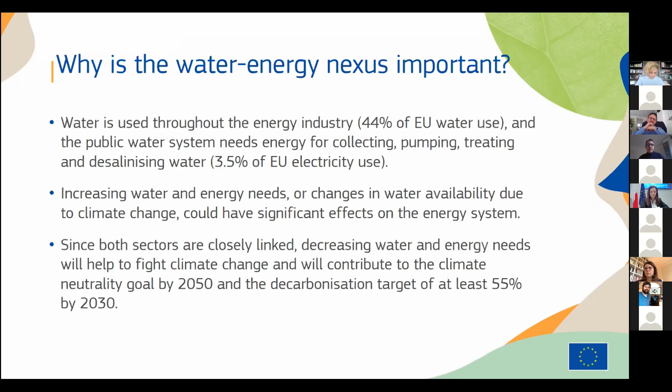So we believe it's important to address this, and it will be increasingly important because water availability due to climate change will also have an impact not only on water use but also on the energy system. Decreasing water energy needs is absolutely necessary for us to meet our goals by 2030, but also further in 2050. If we focus a bit more on the European Green Deal on the energy side, we have supplying clean, affordable, secure energy, and building renovation as important elements, and these are key areas we are working on.

I will focus a little more on the energy efficiency work we're doing in this area, relevant for the water energy nexus. One thing we are currently doing is reviewing the Energy Efficiency Directive. We've had an open public consultation, and specific workshops looking at energy efficiency in sectors. There we've seen that water is also seen as an important area for further focus when it comes to the Energy Efficiency Directive.

The second important element is the Energy Efficiency First principle, which was enshrined in the European acquis, and we are now working to operationalize it. How are we doing that? There is some reference to the principle, and even a definition in the Governance Regulation under which member states must come up with national energy and climate plans. The main focus of this principle is to ensure energy efficiency measures are prioritized when they are the most cost-efficient solution. We are currently working on a Commission recommendation and guidance on how this principle should be implemented in the energy sector, but also beyond it, for example for financing and possibly also for the water sector.

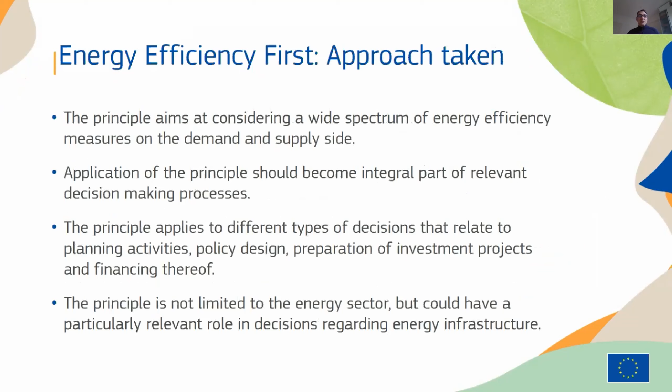The aim is really to consider a wide spectrum of energy efficiency measures on demand and supply, and that energy efficiency is taken into account wherever decisions are taken. This means not only political decisions, but also very practical decisions in terms of planning, policy design, investment projects, and financing thereof. As I mentioned, this is not only limited to the energy sector, but also energy infrastructure, and hence also water infrastructure.

And when I say water, it's important to continue looking more in depth into this link between energy efficiency and water efficiency when decisions are made about, for example, investment into wastewater treatment or other areas such as separate treatment of stormwater. It was already mentioned by Ms. Manfredi, the losses are enormous. Losses of water also mean losses of energy, because the water needs to be pumped and treated. So this is important to look at.

And finally, we will also increasingly look at smart technologies and processes to ensure these technologies are being brought to bear in this area.

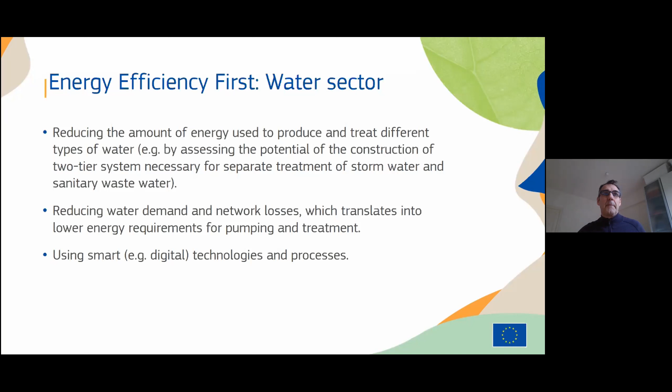Looking a bit more in detail at the Energy Efficiency Directive, which we are currently revising, in particular Article 7 is important because it forces member states to have annual savings, every member state at 0.8%, in the case of Malta and Cyprus a little less, given their specific position. We've seen over the last years that in delivering on Article 7 obligations, member states have taken measures covering the water sector, and in fact Malta is one of the countries that has done most in this area. We would like the example of Malta to be elaborated upon and followed by other member states, because much more is possible.

We also have articles dealing with energy audits. So far this is very much focused on energy, but here too the water sector could do much more according to us. The directive also covers, for example, information to consumers about the use of domestic hot water, which is also very important to raise awareness.

When we talk about awareness, an area that's often forgotten in this field but plays a very important role is what we do on eco-design and energy labeling. You will hopefully know that the energy label changed in the beginning of March this year, where we removed the plus classes from the label in the hope that it becomes more effective. We have measures in place for washing machines, dishwashers, pumps, circulators and motors, which already drive an enormous amount of energy savings, almost in a hidden way.

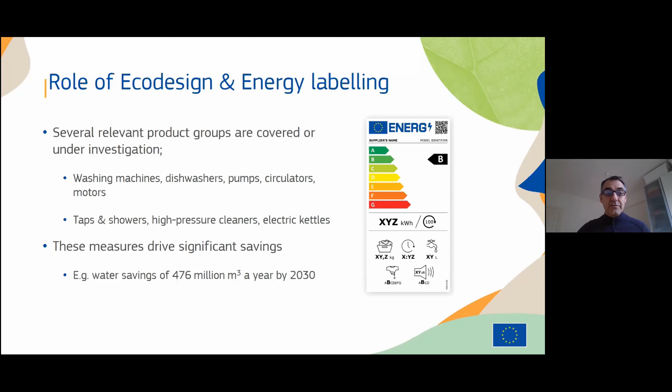Thank you very much. I think that this, and we didn't doubt it, both in the case of Madame Manfredi and Mr. Nuij, opens us up to dealing with these questions in two ways. One, there is a readiness to deal with this question that probably was not there before — not for ill will, but simply because the times were not right, perhaps. You gave us very concrete hints about where our priority in explaining and talking about this question should go, and second, what potential this happy marriage could lead to, both in DG Energy legislation and in water legislation.

I would like now to go to the more concrete part of our work, which is to show what is being done now. You both talked about the need to work with the private sector. I think that is absolutely true, and there is a part of the private sector, at least, that is ready to go, and that started even before the legislation comes — but of course we need to scale up and make it even more systematic.

So I would like now to start the second part of our meeting, which is very rightly entitled — and I want to read it again so we know the framework — 'Realizing the Water Energy Nexus: Case Studies to Support Current EU Policy Implementation and Future Policy and Regulatory Development.' We know that implementation, above all in these issues, is the most important problem of European Union legislation.

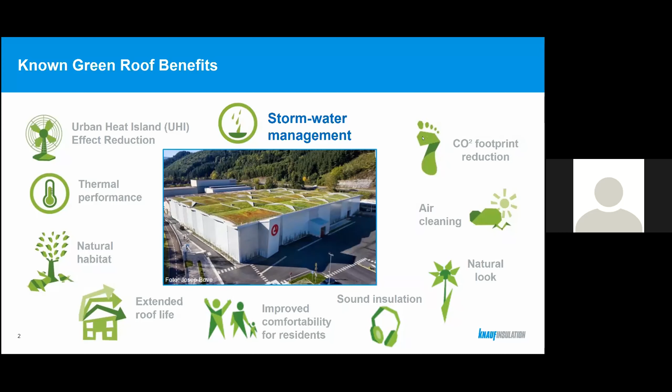So how can green infrastructure actually support the water energy nexus? When you're building a new building, usually you go on the ground, demolish the green space, and build up something — you seal off all the land so the water cannot escape into the ground and later evaporate. So what we need to do is make sure that when something new is built, we make it green immediately, because if you do that, you basically replace whatever you demolished when starting the building.

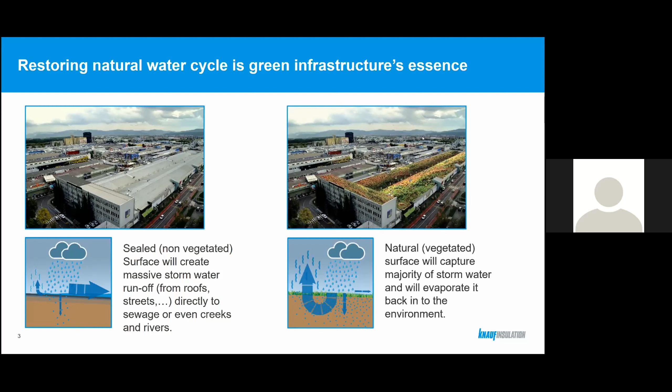You actually do the green part on top of the roof, making sure that all the stormwater which comes from the clouds is captured, retained and evaporated. With this, you re-establish the natural water cycle, which could otherwise be demolished by intensive urbanization. So I will just focus now on two case studies where municipalities and some countries are already thinking about how to implement green infrastructure into new builds.

So, for example, you see on the screen a big shopping mall which was built in France. There was a requirement from the local municipality that if you want to build that, you need to re-establish the stormwater cycle, the water's natural cycle. So just by implementing a green roof on top of the building, the commercial establishment is actually preventing more than 60% of stormwater from coming into the sewage system.

This means the water which would otherwise go into the sewage system without a green roof will actually save a massive amount of energy needed to clean it. If we make sure the water stays on top of the roof, it will evaporate and re-establish the natural water cycle, never reaching the sewage treatment plants.

So there are two benefits: energy efficiency, and when big storms come, it's even worse for flooding of the sewage system. The wastewater cleaning facilities sometimes cannot cope with all the water coming at the same time. They need to open the safety wells, and all the sewage and storm water goes directly into the creeks and rivers, polluting them.

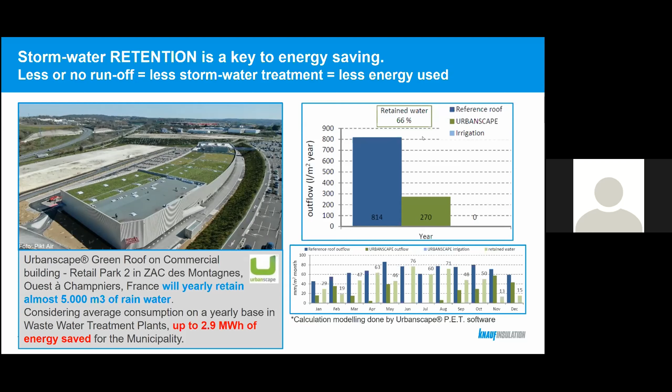Going further, here's an example we planned for the last 2 years: an educational green roof on a school in Slovenia, where I come from. It's basically a roof which, on one side, captures the rainwater as seen before, but at the same time we also implemented a special system which really reduces the amount of water going to the sewage system.

If you imagine how climate is changing a lot, you get these long rains or really short intense rains. The major negative point from civil engineers was always that green roofs do not detain water - when the green roof is full, like a cup, the water will still go through into the sewage system, and you'll need to clean it.

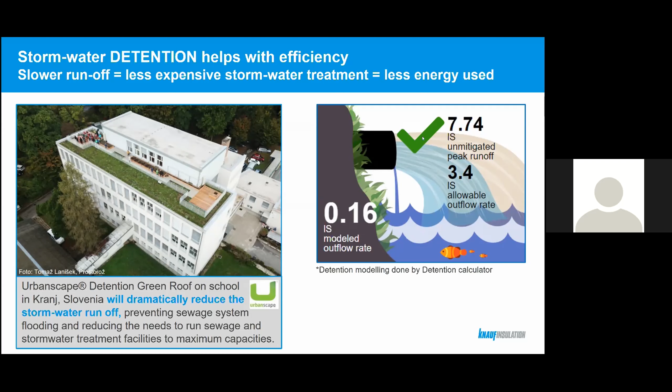But new system developments for green roofs are actually able to control and lower the speed of water going from the roofs into the sewage system, meaning this water comes into the sewage only after a certain time when the storm is over. So the stormwater treatment plants can easily handle this without additional capacity, meaning no extra energy is needed for this kind of cleaning.

So these were the two examples showing that implementation of green roofs really handles the stormwater, preventing it from reaching the facilities that clean stormwater or sewage.

There is plenty of legislation currently ongoing or being reviewed. I'd point out first the Urban Wastewater Treatment Directive, where so far there was no mention of green infrastructure as a way to handle stormwater or limit inflow into the sewage system - this is definitely something we need to improve in legislation. The new one is definitely the Energy Performance of Building Directive, which is another good aspect.

Then we have the Biodiversity Strategy 2030 - we've seen the first drafts, now in parliamentary procedure, and we know urban green infrastructure has already been incorporated. Then there's the Climate Adaptation Strategy, adopted last month, and we're happy to see a lot has been pointed out in terms of green infrastructure.

And of course, the new EU Bauhaus initiative - just the last two Fridays we had open calls with this initiative, people getting together sharing ideas. You could see the enthusiasm of regular people and academia, where they see green infrastructure as one of the cornerstones to support our cities becoming better, more energy efficient, and more green. So there's still plenty to be done, but a lot has been done already in the last 2 to 3 years - we just need to progress with this.

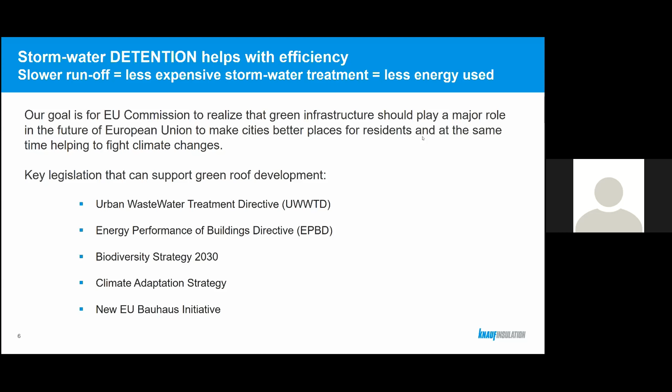That would be it. Jure, I have a question for you. First, can you switch on your video, because I'm not able to see it.

Yeah, I will try to do that because I'm connecting through the web browser, not through the app. So I'm not sure whether I can. But anyway, I just wanted to ask you one question.

You indicated in a very effective way the legislation where you could see certain improvements there. I just wanted to ask, because I'm curious, and we will have other questions later on. What is the situation in the European Union in terms of implementing urban green infrastructure? Is it going on, or is it something that really needs a European push?

I think what the European Union would need to do is, of course, properly implement green infrastructure as a cornerstone of all major legislation. But at the same time, the EU should promote green infrastructure through public buildings—putting green infrastructure on schools in order to tackle climate change and save energy. It's also amenity space where kids could learn. The school I showed actually has an outside class on the roof. Then there's health establishments and office buildings from governments and municipalities.

Thank you. I hope you can see my screen. Yes, we can. Yes, super.

Referring back to the previous speaker, I can only agree with the figures about the water industry using a lot of energy—I think the figure was 3.5% of all electricity used in Europe. And both speakers have talked about leakage. Reducing leakage also means reducing energy consumption, as well as the point that wastewater facilities can in fact be energy producers, and that's exactly what I'd like to touch on with this case.

I won't go too much into the technical details, but we've had over the years a very close cooperation with the utility in Aarhus, Denmark, the second largest city in Denmark. What's interesting is that, as you can see in the pictures, it's a traditional activated sludge treatment plant—like probably 80% of facilities in Europe. And the water supply is based on groundwater, which I think is the case for 60% or so in Europe. So it's a very traditional water cycle on the drinking water side.

On the wastewater side, it's not a new build, it's an old facility covering around 200,000 people. The other important thing to understand about this catchment area is that for the energy use I'll describe, there are no windmills, no solar panels, no heat pumps, no sludge from other facilities, nothing from the food industry, and the sludge is not burned. It's not because we have anything against windmills—not at all, we love them—but it's super important to understand that this can be copied. It's basically household wastewater and traditional drinking water supply, so there are no tricks with energy coming from outside or sludge from another facility.

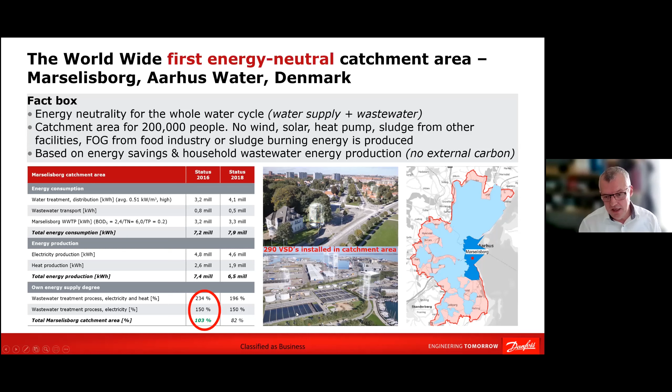If we look at the 2016 figures, they were in fact in plus - meaning they had all the energy they need for the wastewater facility, plus enough surplus to pump water into the city, pump the groundwater up, and pump the wastewater. So for 200,000 people, you can make both drinking water and wastewater energy neutral, or at least at balance, converting wastewater facilities into energy producers. What's really key here is what has been done to this facility.

It's super important to understand it doesn't need to be a newly built facility. This is our old facility, I think 30-40 years old, and it looks like the major part of facilities do in Europe. What were the key elements? One was a tremendous lot more real-time sensors, which is basically what we mean by digitalization - combining different sensor signals in different ways.

They of course use highly efficient components, as there was a talk about also, and then they have full-blown controllability - we have variable speed drives and so on, so you can really adapt to the changes in the water industry. And if you combine these with real-time process control, then you can gain these things.

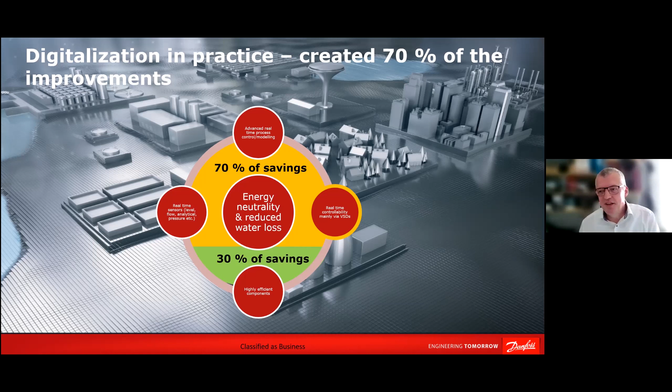So the component savings are around 30% of the whole savings they've achieved. But we certainly need regulation pushing on utilizing all this energy embedded in the wastewater, while also reducing leakage, because they would never get to this point if they didn't have low leakage. They have leakage around 6% or so - if they had leakage of 30%, they would use far too much energy on the drinking water side.

We really need somebody to push more on how we can utilize this. This is a case showing it's possible in practice - it's been working for 5 years now. We have 3 or 4 other facilities in Denmark doing roughly the same. We see US, Chicago picking up on it. We see the Dutch picking up on it. So it's slowly moving, but I surely think we need some regulation to move forward.

I could add that the Danish government, based on this experience, has made a decision that they want Denmark to become, on the water side - both drinking water and wastewater, small facilities and big facilities - completely energy and climate neutral by 2030.

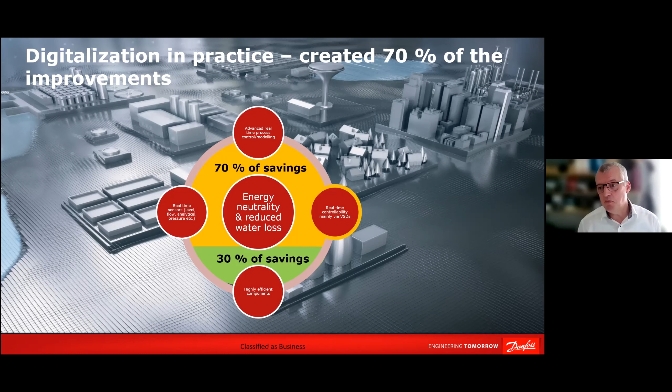And it's probably even a better return on investment in the major part of European countries than we see here. I know the electricity prices, which are key here, in Denmark are lower than, for instance, in Germany and a lot of other places, and Italy and so on. Italy has roughly double the price of what we have in Denmark, so with a double price you'll have an even better return on investment. So yes, I think that was the words.

Monica? Yes, I'm talking to myself. Can I just ask you a very quick question as a follow-up?

I think one of the issues we have to underline is this point that savings come from the process, not only from the technology. That's really key, because the industrial process is different from the specific technologies, and sometimes the two things get mixed up, and the potential of both gets mixed up too. Sometimes this isn't conducive, because we're not talking about single products, but about the whole industrial process that makes the difference. I think that was a very important point.

I'd like to ask, you talked about the prices, but did you have interest from other countries, since you're a multinational active in other countries as well? I wonder if there's interest in this concept beyond your own country, and if you can think ahead about what the next step is. Briefly, and then we move to the next point.

Yes, we have seen a lot of interest around the globe. I'll say California has picked up a lot and is in the process of copying some of this. Chicago, similarly in the US. We've seen China have interest in it as well. In Europe, we've seen the Dutch looking very much into it.

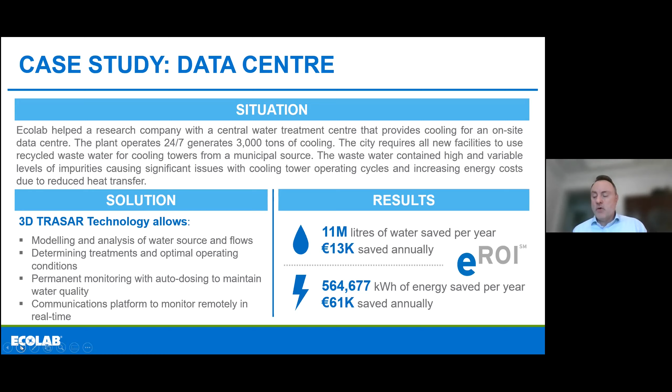As I wrap up, I just wanted to conclude on a couple of points. Industrial competitiveness, and one of the tools we could think about and would support, is the EED as an enabler to leverage further the water energy nexus. I would say many multinationals today are aware and understand the connection between water and energy, and therefore can identify energy savings.

Cost savings not only have a positive impact on the environment, but as well on the bottom line. There is a tremendous opportunity to expand that as well to small and medium-sized companies in Europe, and by doing so, enhance EU industrial competitiveness across the board. We believe EED is a very adequate tool to help enable that - not the only one, but one that can help.

We see that EED Article 7 is a great opportunity to educate these companies on the opportunity to improve their business and help count toward energy savings targets. Maybe what is needed is an incentive scheme at member state level to bring this to the attention of companies and plants. I think hopefully today, by having this workshop, that's a great way to illustrate examples on how that can be done. Thank you.

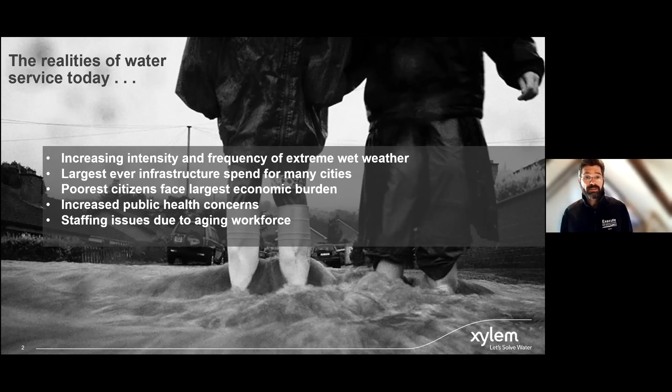But we also understand that our citizens are under a lot of economic pressure, and it's a huge burden on the taxpayer to also address water infrastructure updates or growth of our infrastructure. We understand that public health is becoming more and more critical, especially in the last year and a half, where the pandemic has hit us all, and understanding how we can use water as a tracer is critical. Then within the water sector, we understand there is a very aging workforce, and the transition there is getting critical as we are facing the availability of new technologies.

When we look at the industry right now, we are facing a very difficult status quo. The status quo is that we are investing billions into infrastructure for water supply, sanitation, and stormwater management, and it always requires more because of the challenges I was just mentioning before.

The problem underlying this is that we are maintaining heavy investments in conventional gray infrastructure, which adds huge pressure on taxpayers and local governments. It's critical to address this.

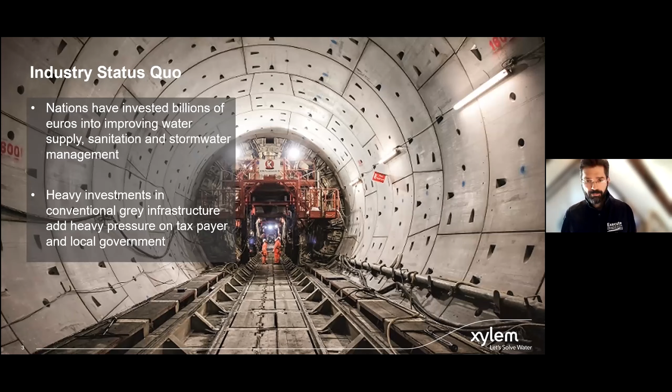The picture you see here is the Tideway Thames tunnel, about a €6 billion investment in London to manage stormwater underneath the city. That structure is huge in terms of investment, environmental footprint, and energy use for managing the draining of stormwater.

So how can we, together with public policy, advance to the next generation of infrastructure, both to reduce the cost of providing such services and to make them more sustainable, reducing energy use and footprint while improving the management of water?

The benefits we always call higher performance and better efficiency are actually very tangible. I'd like to highlight capital savings, and I'll have a case story about this in a minute. Also operating efficiency, both for energy use and labor efficiency, focusing labor on more active or efficient tasks. Affordability, public health, environmental quality, and resilience. Resilience for critical infrastructure is something we're discussing recently, and it's important to address.

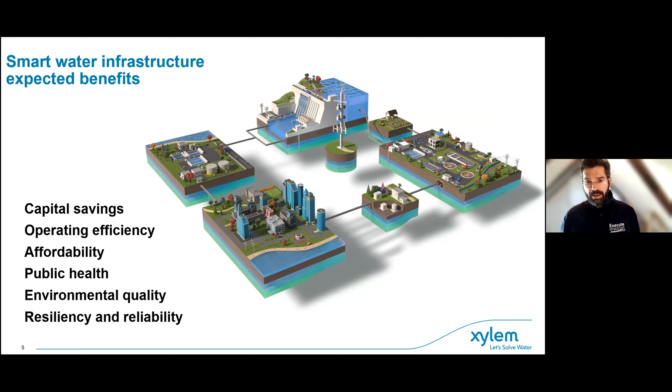I'll go through three case stories here very briefly, since I know we're a bit short on time.

The first one I'd like to highlight is the use of a digital real-time decision support system. It's a complex term, but basically it's the use of artificial intelligence to sense, using sensors within the treatment plant, predict by learning the historical behavior of the processes, and support the operator in taking decisions and tracking those decisions over time.

The case story here is happening in Cuxhaven, Germany, and it led to a saving of 26% of energy use in the biological treatment of this wastewater treatment plant, resulting in about 1.1 million kilowatt-hours saved annually, equivalent to 330,000 euros per year. So in perspective, it brings up huge potential.

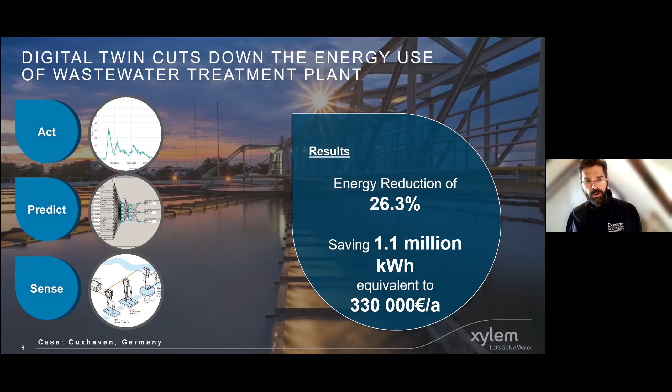If you combine this with the results shared by Matt from Danfoss, imagine the potential of truly making that plant 100% energy positive. The second example is applying the same artificial intelligence to the collection of wastewater and stormwater networks.

It's similar to the one built in London, but instead of stepping forward in gray infrastructure, we use blue infrastructure—digital, artificial intelligence. Through the same sense, predict, and act approach, there's an opportunity to combine the hydraulic volumes of those networks, make them work together, and save up to 70% of the initial investment planned into gray infrastructure, into civil works or concrete. This case is from the US.

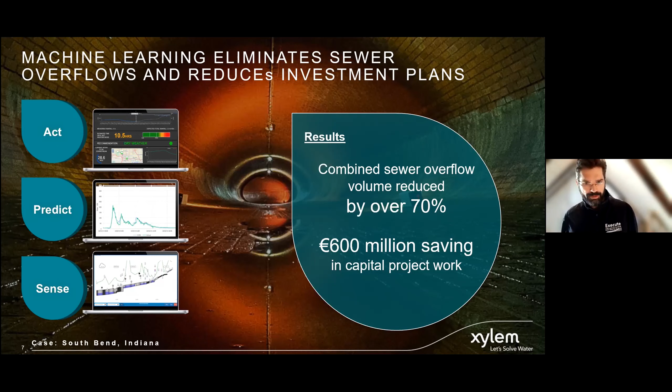Out of a 1 billion dollar project, the AI project saved up to 600 million euros. I'll skip the last example, since I think you all understood that the use of efficient equipment and technologies also helps cut down related emissions, as my colleagues and peers in the sector have already discussed.

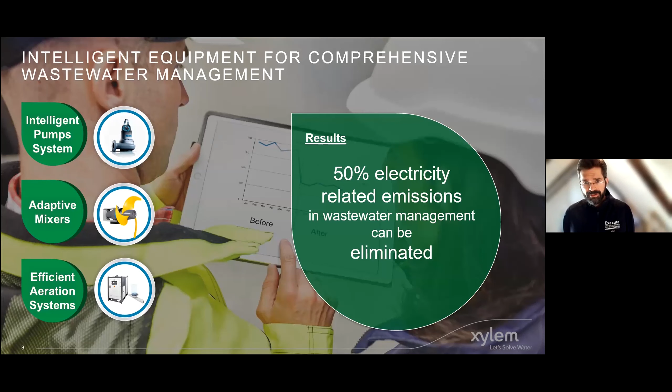So I'd like to move to my concluding messages. Today we don't need to replace infrastructure, we don't need to build new or more—we need to modernize. Modernization is critical to move forward on the water-energy nexus and to stretch limited infrastructure with limited capital investment.

So the technologies are allowing us to leapfrog past underinvestment, which today results in failing infrastructure that isn't sustaining the needs we have.

But we also urge any legislation addressing water to truly incentivize the adoption of these digital solutions, the same for green infrastructure. Blue infrastructure truly needs to be adopted through legislation, and I'm happy to discuss how we can support or help enact such legislation. Thank you very much for the time today.

I'm happy to take more questions. Thank you very much, Alexis. Unfortunately, we are really running out of time, but I think the messages at the end of your presentation are extremely clear.

And I'm sure that there will be time and possibility, if necessary, to come back. And I come now to the last intervention of this important, very concrete part of our work. I would like to give the floor to David Sacco, who is the manager of desalinization services of the Water Services Corporation in Malta. He will talk about applying the water energy nexus in the provision of water services. Mr. Sacco, you have the floor.

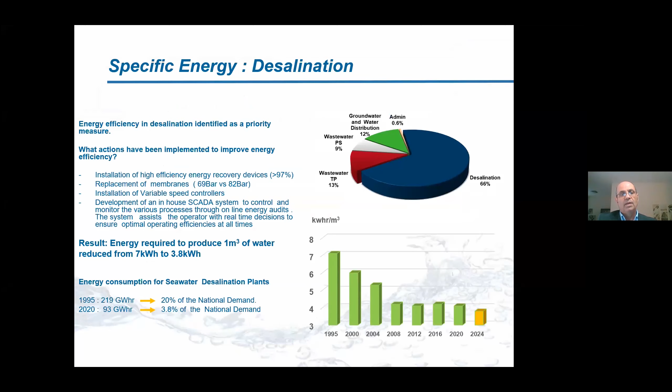Okay, now we see your presentation. Okay, so with such a dependency on desalination, energy efficiency became a priority for the Water Services Corporation.

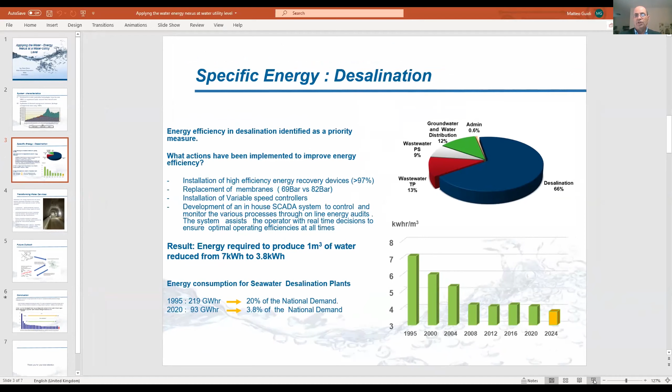What have we done to improve this efficiency? The first thing we've done was to carry out an energy audit to identify areas for improvement. Concurrently, we also changed the procurement policy, the policy to select equipment. Before, it was based on capital, CAPEX, but we changed it to introduce the whole life cycle cost, because this gives importance to the energy efficiency of the equipment. So this was very important. This change in policy helped us identify more energy efficient equipment.

We replaced the energy recovery devices presently installed in these equipment. Before, they were reverse running pumps with an efficiency of around 78%. We replaced them with isobaric devices with an efficiency of 97%, which was a great improvement. We also replaced the membranes. The membranes at the time were hollow fiber membranes operating at a pressure of 82 bar. These were replaced by spiral wound membranes operating up to a pressure of 69 bar. Again, a significant decrease in operating pressures.

We also installed variable speed drives to match the pumping equipment with the system characteristics, because we found out that we had a lot of valves throttled along the process, and this was leading to considerable amount of energy lost in these valves. More importantly, however, we developed an in-house SCADA system to control the whole process. So this SCADA now is programmed in a way to control the whole process. Once a system is commissioned, the optimal parameters are entered into the system and are used as benchmark by this automatic system. So this SCADA system controls the operational efficiency of all components within the system.

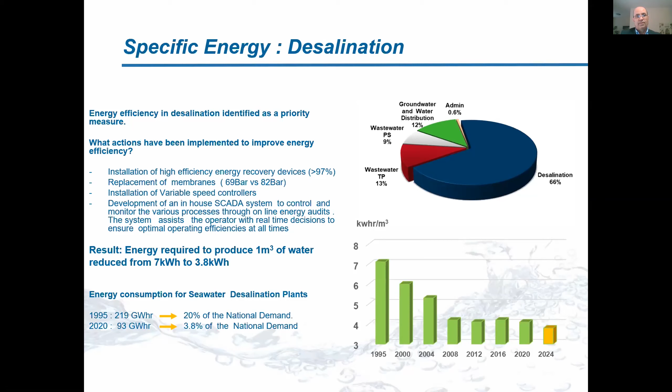Now we're moving on, using the same concept, because the reduction in RO energy has placed an increased importance on other sectors of our service provision. We are also focusing on other areas, for example groundwater. We have a number of sources, groundwater boreholes, so we are focusing on getting the same amount of groundwater, however, from a spatial area, hence improving the quality of the water. Improving the quality of groundwater implies we need less RO water, hence the energy is reduced for the blend. Again, reducing unnecessary pumping pressures is a very important aspect in our distribution.

We have some main networks which also are connected to consumers directly. This will increase the pressure, especially during the night. So we are now having dedicated networks to transfer water, especially from RO plants directly to our main reservoirs, hence reducing friction losses and also reducing energy costs.

Seawater intrusion in our wastewater network is another issue. Around 10% of the water in our sewers is seawater intrusion because part of the network is under sea level. So we're tackling this to reduce this influx of seawater. Also, we're improving the energy efficiency at our wastewater treatment plant by introducing the same principle that we have in RO plants, the SCADA systems to control and acquire data and manage the process automatically. We're also increasing the energy recovery from biogas generation in the wastewater treatment plants.

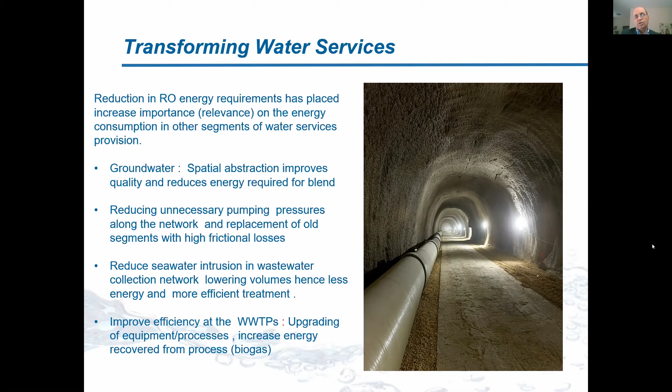We are also developing a system whereby what we have achieved in our water plants is also replicated in our whole services. So we are looking at the production side, we are looking at the distribution side. We are predicting the demand, and this tool that we are developing will help us to decide which sources to operate and how we manage the whole operation in order to reduce the operational cost and the energy consumption of our operation.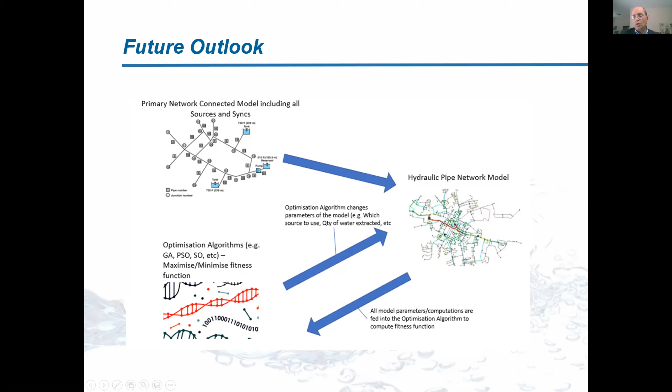So the significant reduction in energy requirement per cubic meter consumed was achieved mainly through water demand management, because, as has been highlighted, every cubic meter saved is energy saved, and also by improving the energy efficiency by reducing the energy required throughout the whole process. So our vision is to keep reducing this energy used for our processes by operating on the comprehensive water services cycle, whilst continuing to emphasize water demand management at all levels.

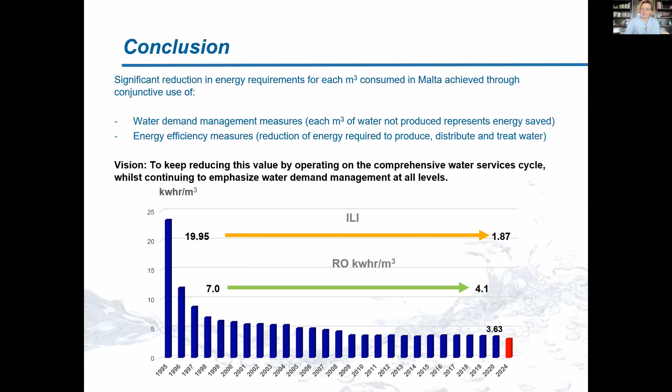Thank you very much. Thank you very much indeed, Mr. Sacco.

I actually wanted to know how much energy we're saving, but you answered the question, so it's perfect. Now I would take advantage of the few minutes more that Madame Bonafé can stay with us to ask if briefly Veronica and Robert would like to come back to some of the points. We will go on having contacts etc., but just if you have a couple of issues to touch, thanking again Simona for her patience for these conclusions.

Veronica, ladies first. I'll try to be super brief because we're really running out of time, and the important messages from me are coming naturally from all this presentation, and maybe also in particular this very last one, where we see that in order to get there where we want to be, we have to work on all the pillars, reduce the demand. So this makes the point about water efficiency also, but not only in our households. And I think it opens the long-standing debate about the right price for water, and water being charged in the right manner across all the users.

Today, I think we are disproportionately letting the consumers pay, the individual households, industry to some extent, but maybe not everyone else who should pay for it properly. The pollution levels, how much by basically cleaning our rivers, our seas, our groundwaters, we reduce the need for treatment, and therefore we become more efficient. I hope that the Zero Pollution Action Plan that the Commission is determined to table before the summer break, and around which we will organize the entire Green Week this year, please come, 31st of May, 4th of June, will entail a number of practical measures to really implement what the treaty tells us to do. Prevent at source, and remedy and clean up as much as you can.